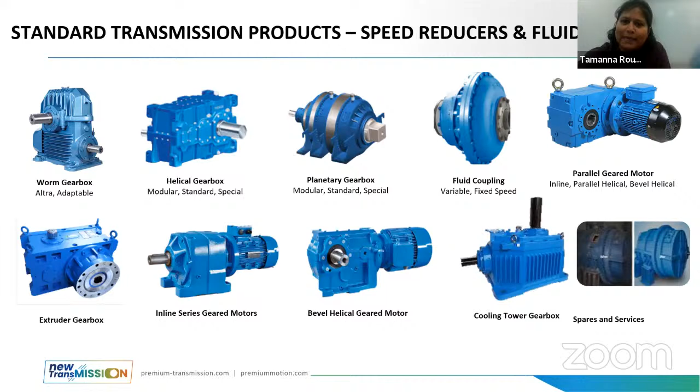We also make a lot of customized couplings and gearboxes. There's something called drive pack solutions, which is a combination of gearboxes and fluid couplings. As we saw, Premium is one company which has the complete package - for any mechanical transmission whatever is required, we are a one-stop solution. We can make gearboxes and fluid couplings both, and together this is called a drive pack.

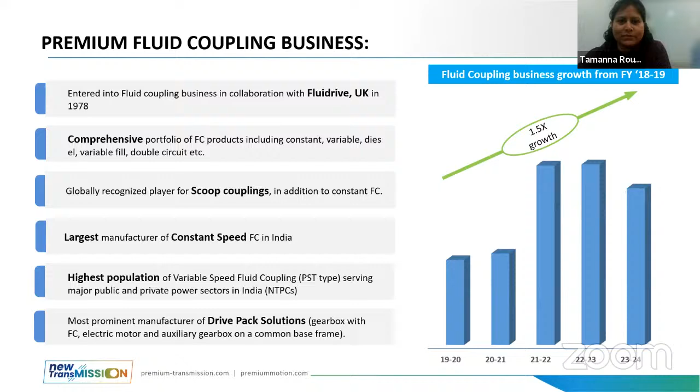Year on year we have seen a lot of growth in fluid coupling, which means this business is growing. Business growing means this product has a need in the market. So what you are studying in college, at least some of you are going to need this technology, this knowledge, when you go outside of college to industries.

Now from here I'll give it to Abhay. Abhay will talk about the products, the technology - I think he'll start right from the principle.

Is it okay, Roja ma'am? Is the speed okay? Yes, yes, okay. Now Tamanna ma'am explained already about the significance of the product, fluid coupling and gearbox. Let us make this session more interactive since it's an engineering product - if I keep talking, maybe something may not be clear to you. If you have any doubt, you can stop me and ask questions. In the seminar hall, keep yourselves unmuted, and if there are any questions, people can ask right away. Please make it interactive, because we've been in the industry for the past 15-20 years, so generally we go in a flow, and being in sales we also get into sales mode at times. So please keep asking questions.

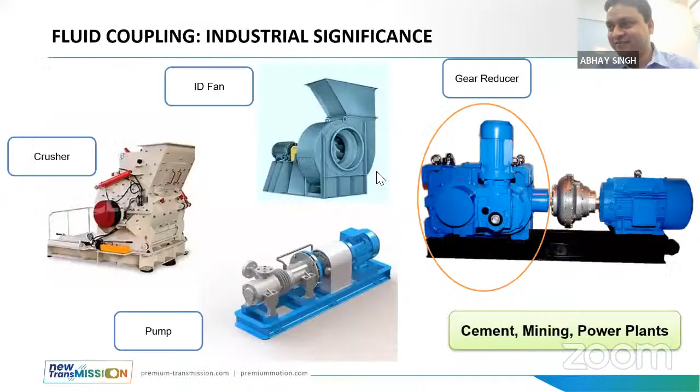Now, is this slide visible to all of you? Yes, sir. Hello. Seminar hall, can you see the slide? Yes, sir. Hello. Sir, we are responding, are you getting our voice? Hello, hello. We can't hear you. Maybe you can answer in general. Sir, we are responding, are we audible? Yes, sir, you are audible. Are you getting our voice, sir? We are responding. We are not able to. Oh, okay. Sir, you are audible. Hello, okay sorry, there was a problem. So we will be joining from my screen. So are we audible? Yes, yes, yes ma'am, you are audible. Sorry, we were not able to hear, there was some problem now. Is this slide visible to all of you? Because this is important. Yes, ma'am. Sir, your screen is visible. Are you getting my voice? Yes, we can hear you. Yes, we are responding, sir. Might be there some technical issue or internet problem. No, no network issue, there was a challenge on our side. It's sorted now, we'll go ahead. Okay, yeah, yes, now good to go.

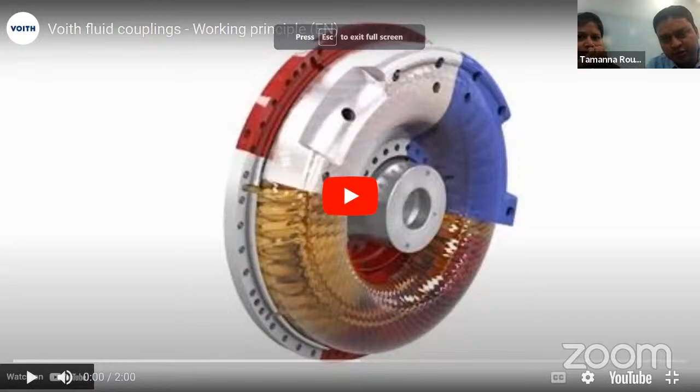Can you see the video, one of the videos from YouTube? Yes, sir. Okay, now it's a very simple illustration.

Then after some time you see what happens, and in between there is nothing placed. It is only air, no fluid, nothing, only air. So now let us start the video.

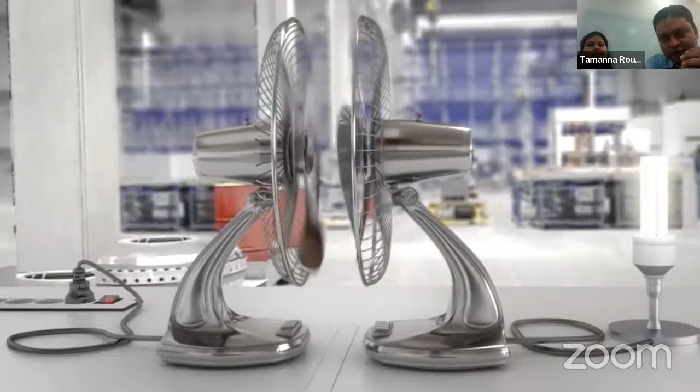You see, once you start the first fan, then the second fan also gets started. And now you have to understand why the second fan blade is getting started. You see... yeah, then you see the complete video, then we talk about it. Try to understand what is happening here, then it will be more clear how the fluid coupling works.

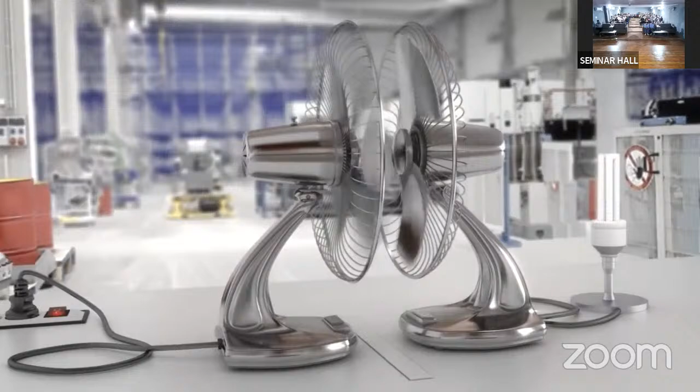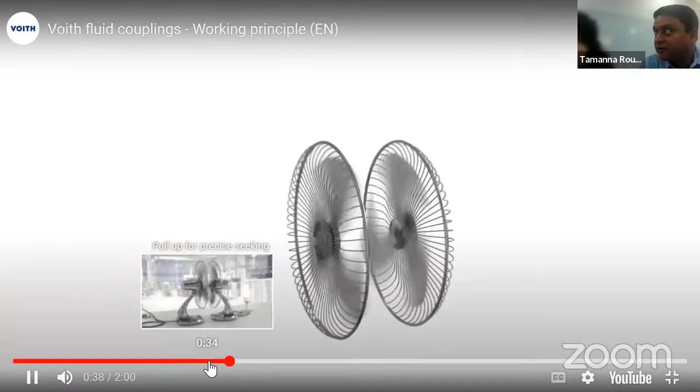Sorry? Impeller, correct, very right. The left part is the impeller getting power from the electric motor, and the right part is the runner which will be connected to the driven machine.

And now you tell me how this second blade is getting started. Which fluid is responsible for that? Air. Air, very right, yes, air.

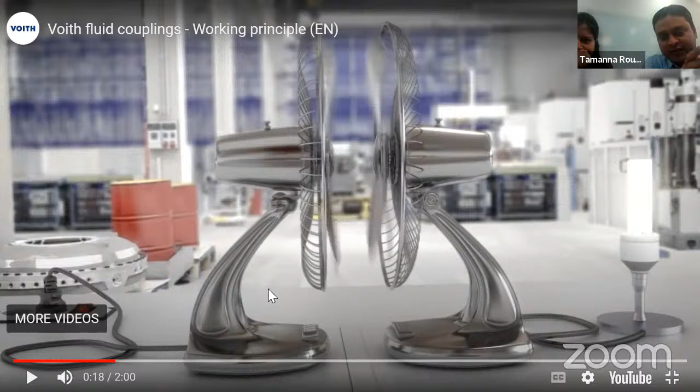So in this case, air is taking the power or energy from the impeller and transmitting it to the runner, and the runner is connected to some other machine and giving back energy to that other machine. So in this case, power is transmitted through the air, so we can call it air coupling, not fluid coupling.

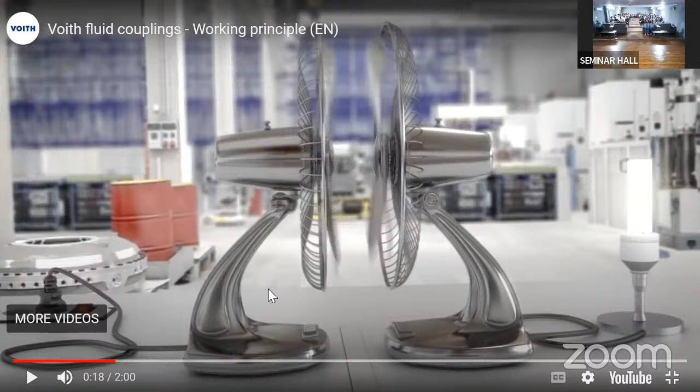Okay, but if you replace air with oil or any other fluid, it becomes a fluid coupling in a closed circuit. Now it is an open circuit because we cannot entrap the air, it's completely open to the atmosphere. But you have to make a closed arrangement, in which you put some oil or water, and then give power supply only to one part.

We call it the impeller. Then after some time, you will see that power is getting transmitted to the other part without any mechanical connection. So connection is established through the fluid only.

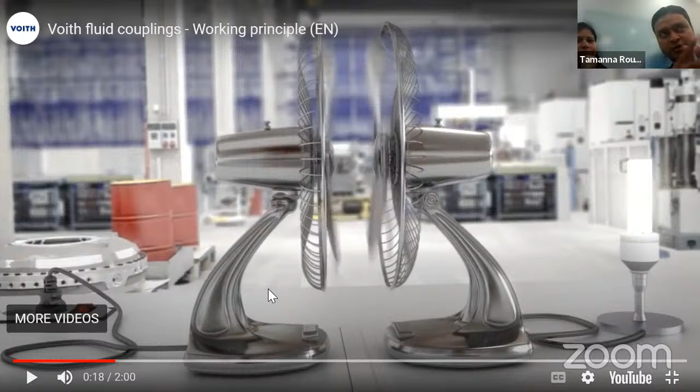Okay, I think this video is very clear on how this fluid coupling works. Is it okay? Yes, sir, perfect. Yeah, now you can see.

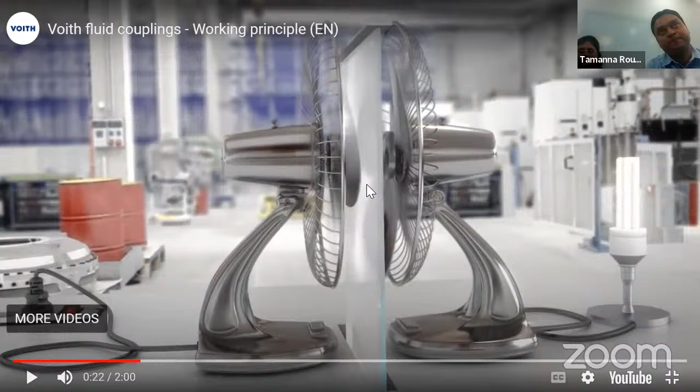Now you have to understand what happens here. If you put a glass plate between the two fans, now you cannot transmit the air flow from one side to the other side. So this glass plate is obstructing the power transmission.

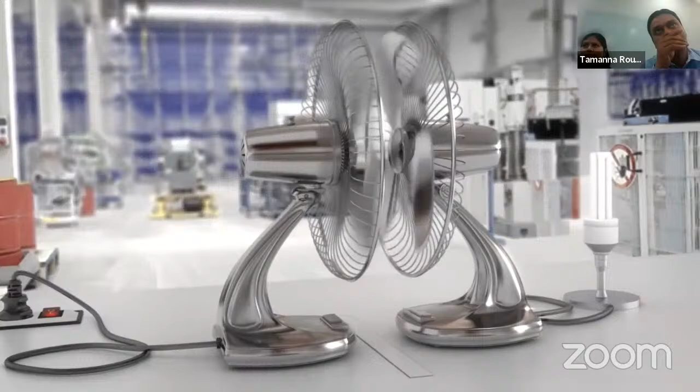See here, once you put the glass plate, the second fan is not rotating because you have obstructed the flow of air. Now you put the glass plate, so you stopped the air movement, so the second fan also does not rotate.

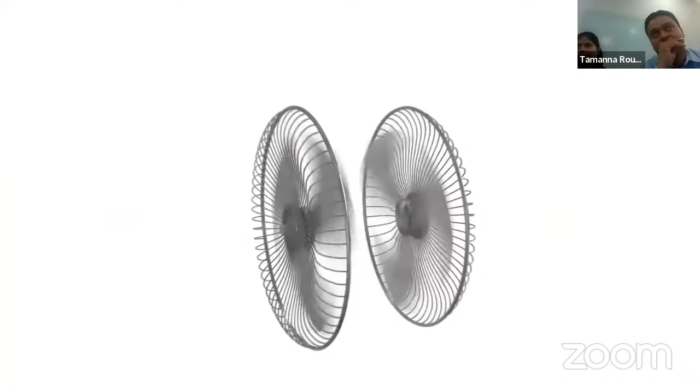Now you can see this will be converted to the impeller and runner. You see, so the fluid coupling looks like this only. Two major components, impeller and runner.

Between them you find the fluid. You can see here. That's it. It's very simple.

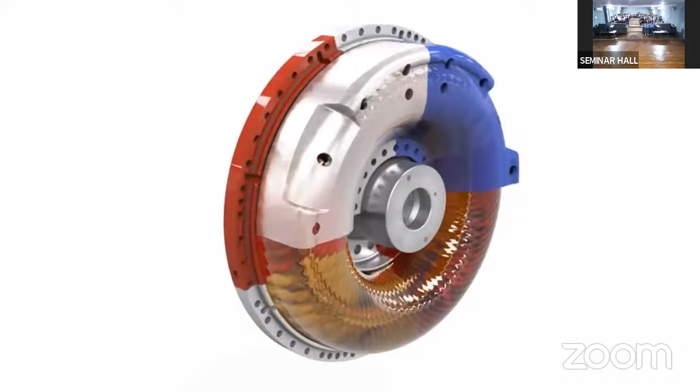So in this case, you don't have the mechanical connection. Connection is established through the fluid only.

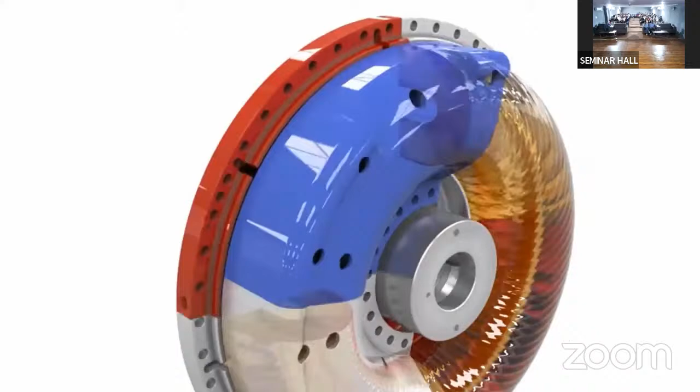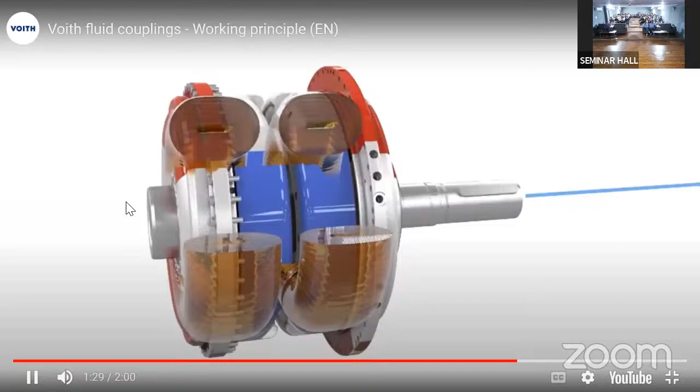We can talk about it in a later slide. Okay, I hope it is clear now. Now let us go to the next slide.

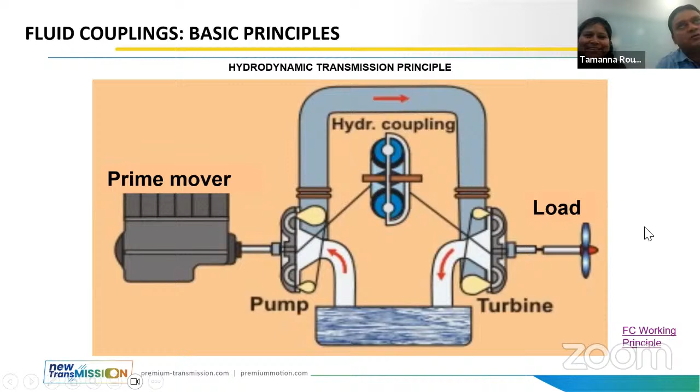So in coupling, you have both possibilities - you can get constant speed and you can get variable speed. Now the next question is, why do you need variable speed?

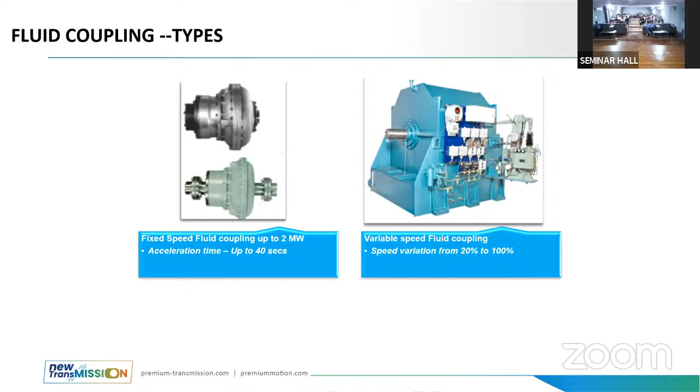Okay, now let's go to the next slide. Sorry, this is a YouTube video. Sorry, this is a little inconvenient. Okay.

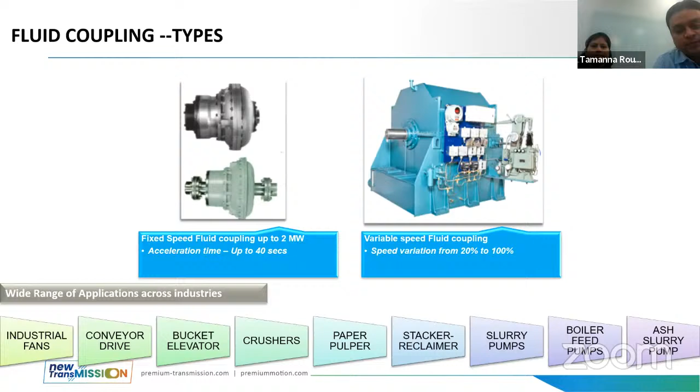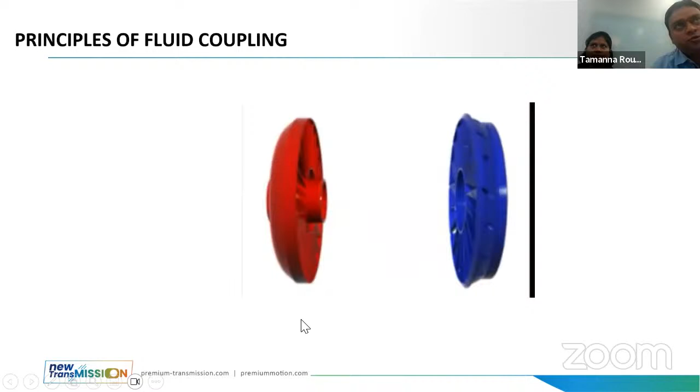Now this video is visible to you. Yes, so now it is again the same video. You can see here the left part is an impeller, the right part is a runner, and between them you find the fluid. This fluid is responsible for transmitting power from the left part to the right part. This is the same video we showed in the past slide.

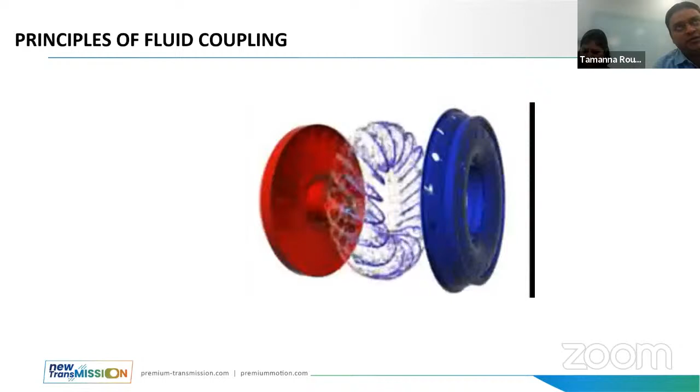What you see in between is the ring of oil, we call it a vortex. This vortex is what transmits power. And this vortex can be oil, or it can also be water.

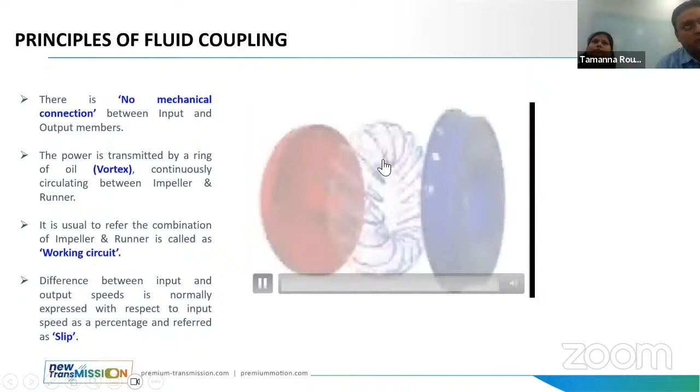We'll talk about that later. Then the combination of impeller and runner, we call a working circuit. So this complete combination is called the working circuit. And this last point is very important.

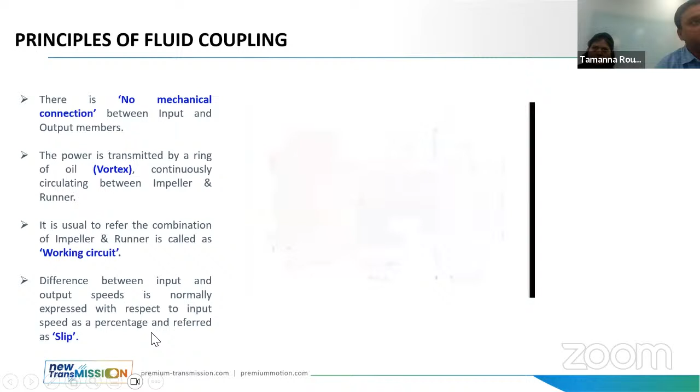The difference between input and output speed is normally expressed with respect to the input speed as a percentage, and is referred to as slip. So this point means that if the left side is rotating at a constant speed, the right side will be rotating at a lesser speed, and that differential speed we call slip.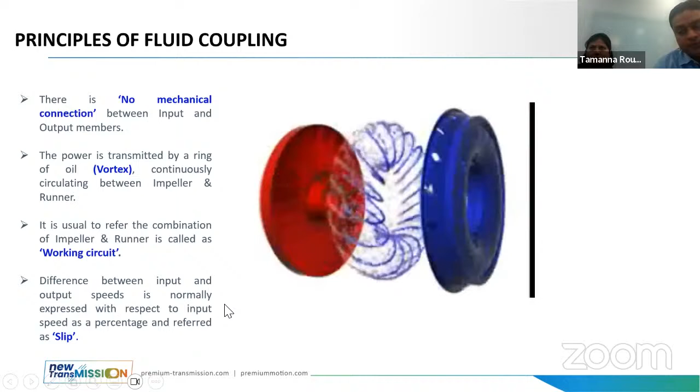नाउ कांस्टेंट स्पीड का हमने बात किया। सो लेट अस टॉक अबाउट द वेरिएबल स्पीड फ्लूइड कपलिंग। हमने लास्ट स्लाइड में दिखाया था ये पिक्चर आपको। ये देखिए, ये वेरिएबल स्पीड फ्लूइड कपलिंग है।

तो बहुत सिंपल प्रिंसिपल है। अगर आप क्वांटिटी को कांस्टेंट रखते हैं तो यू ऑलवेज गेट द कांस्टेंट स्पीड, बट विद द हेल्प ऑफ सम मैकेनिज्म इफ यू कैन वेरी द अमाउंट ऑफ द ऑयल इनसाइड द सर्किट, इनसाइड द इम्पेलर्स, देन यू गेट द वेरिएबल स्पीड। तो वो आपको सोचना है। बीइंग एन इंजीनियरिंग स्टूडेंट यू हैव टू थिंक how you can vary the amount of the fluid while working condition।

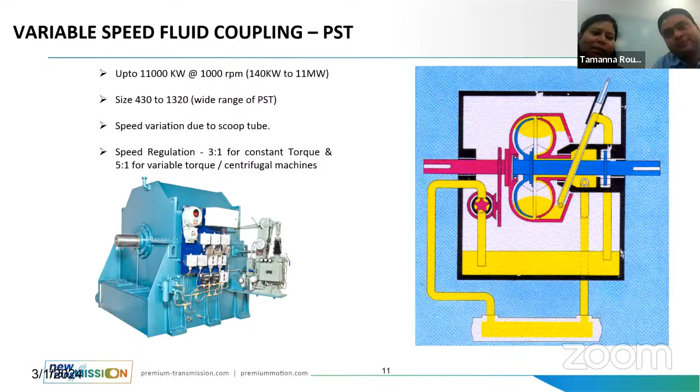Aur agar yahan rule hai, if you don't ask then Abhay asks. So either you have to ask or Abhay will ask. So it's up to you. Abhay sir will ask. Okay, Abhay sir, please ask.

Like at home, when you use a fan and it's a very old fan, when you switch it on, the fan starts abruptly. So it is a very strong start, which is sometimes not good for the life of the machine. So you have to ensure that the fluid coupling helps to start the driven machine softly. So this is one of the advantages.

If you didn't use fluid coupling in a conveyor belt, the belt's life would reduce. For example, if it is directly connected to the belt, it gives 6 months of life. But if you use the fluid coupling between the belt and electric motor, it can extend the life up to 5 years. So the fluid coupling helps enhance the life of the driven machine because of the soft start.

This is the first important advantage. Then, low starting current. If your electric motor is directly connected, then the motor will consume 6 times higher current than the nominal current, which is very high. But if you use the fluid coupling, the motor will consume only 1.5 times the nominal current of the motor. So this is a highly energy efficient method.

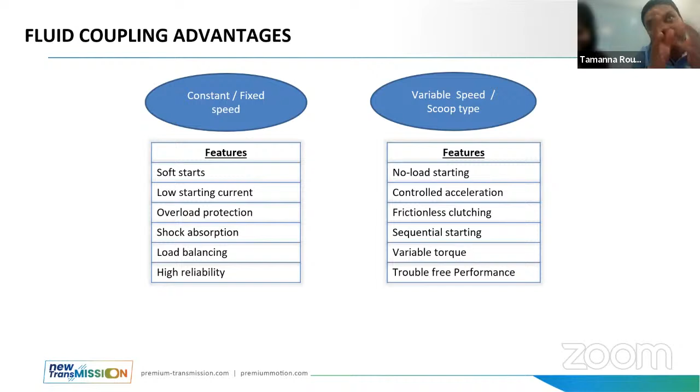Now in variable speed coupling, you get almost similar benefits, only you get variable torque here. So apart from the other benefits, you can vary the torque as per the requirement of the application. All other advantages are similar to the constant speed fluid coupling.

Is it okay for you? Yes sir. If you have any doubt, you can stop me and ask.

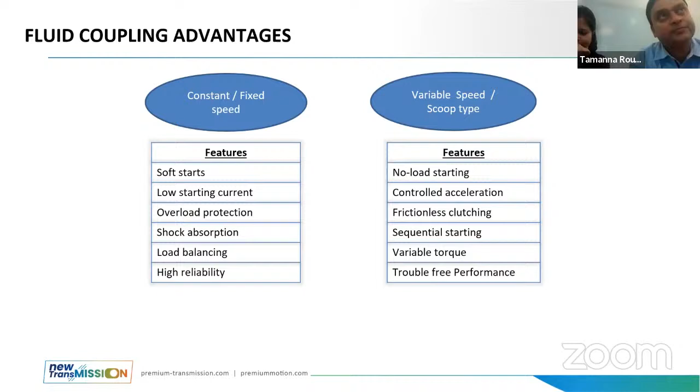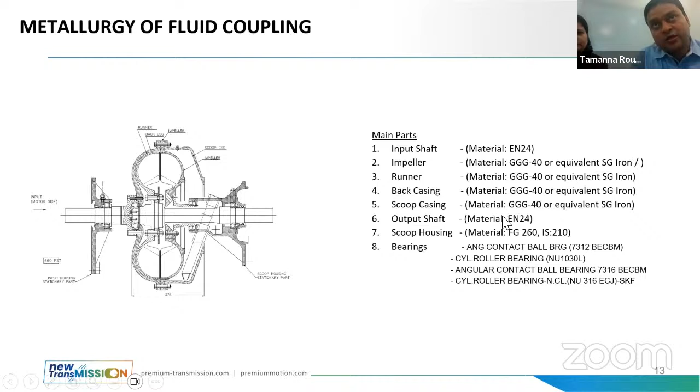And then for the bearing, we can have a variety of bearings. All bearings are anti-friction bearings.

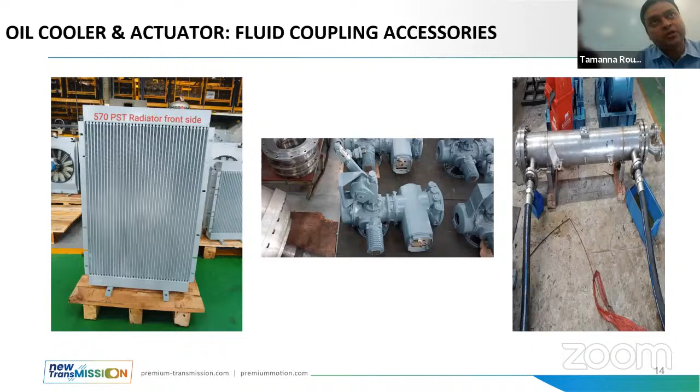So all these components are the accessories to help the fluid coupling ensure its smooth operation. And this is the electronic part, the robust control by the electronic instrumentation.

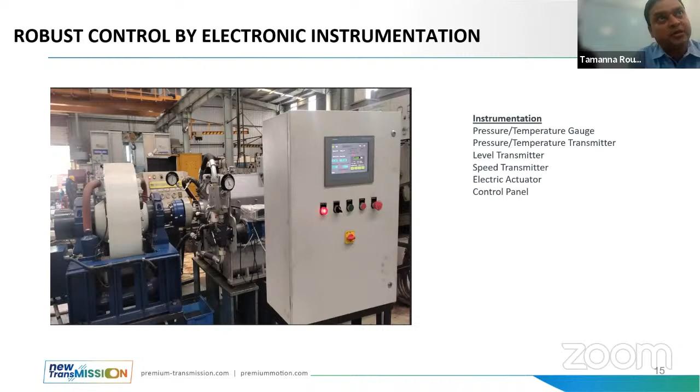Been to any power plant? Anybody of you? I'm not able to see any hands raised up.

Okay, so we'll just quickly take you through a process flow chart of a thermal power plant, so you get to know what processes happen, where transmission happens, where mechanical transmission happens, and where these couplings are fitted. That will just give you a little brief.

Also, whenever you go for placement, this may be an interesting topic for all of you, because in interviews also they may ask you something related to the power plant. So for any mechanical, or maybe sometimes civil engineer as well, it's a very interesting topic. You must understand the flow process of the power industry.

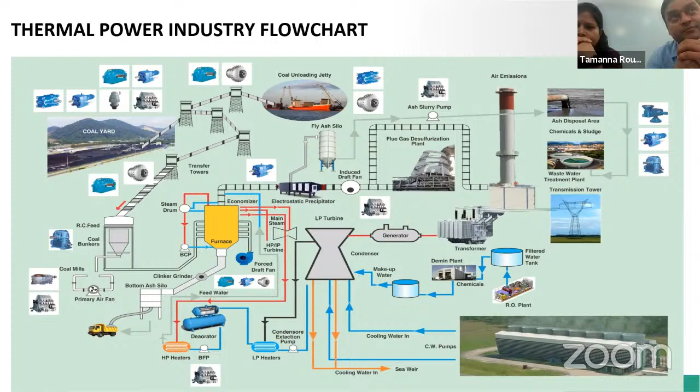Is it clear? Yes sir, perfect.

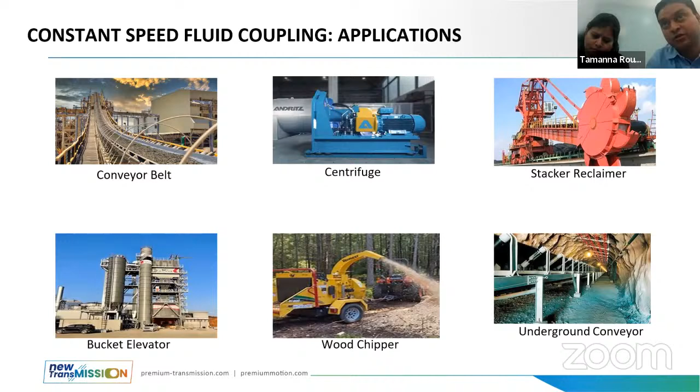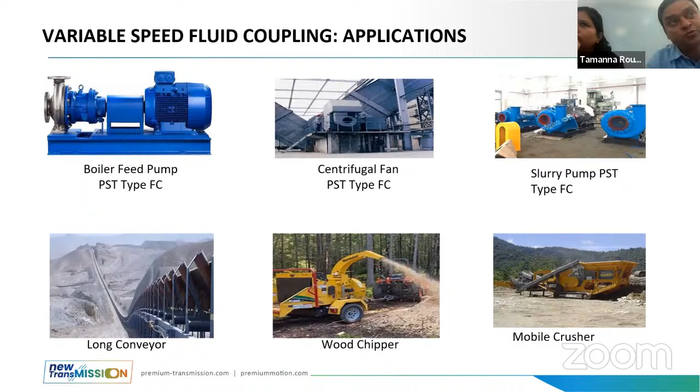And underground conveyor belt में भी आप एक्वा फ्लूइड कपलिंग यूज करते हैं जहाँ पे ऑयल की जगह पे वाटर यूज करते हैं. And then this is the application for the variable speed fluid coupling. So pump है, fan है, slurry pump है, mobile crusher, again wood chipper and long conveyor. So these are the applications where you have to vary the speed with the help of the variable speed fluid coupling.

Then this is the load testing setup in our factory in Aurangabad. आप जब coupling बना लिया तो you have to make the load testing before dispatching, otherwise you make a mistake.

So now you can see here, this is the electric motor, this is dynamometer, where you have to apply the load. Between these two spaces, you have to mount the fluid coupling. Okay, and then you apply the 2000 Newton meter load with the help of the dynamometer.

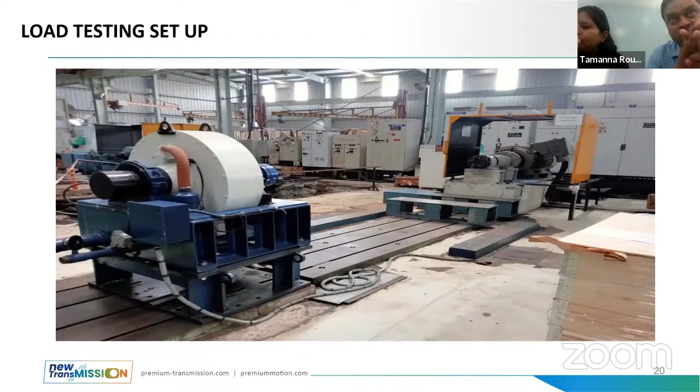Then you check the vibration, you check the temperature, you check the pressure, and you check the leakage, and also you check the sound at 1 meter distance. So all the parameters, if they come within the defined limit, then we approve it. Then the coupling is ready for dispatch. So this is one of the critical manufacturing processes where we ensure the quality of the product.

और हम एक रिपोर्ट भी जनरेट करते हैं, वो रिपोर्ट भी यूजर को जाता है. Is it okay or you have some question here? No, sir. Okay, perfect.

Now this is an opportunity in the global industry. Here you can see it's the global map where we talk about the mining companies and cement companies. आप देखेंगे worldwide, every country में, every continent में you find the mining industry. So it is a huge industry.

So showing this slide, the purpose of showing this slide is to talk about the opportunities for you guys. If you understand the industry, you understand the application, you can venture and you can maybe utilize your experience to the various applications globally, not within India only. So likewise, cement industry also, you can see a lot of cement industry globally.

Okay? और अगर आप potential की बात करेंगे तो then you can see here एक power plant में, sorry mining में 500 fluid coupling use होता है. Only one mining, 5 million ton per annum का capacity वाला mining में 500 fluid couplings you can use. In one of the thermal power plants you can use 200 fluid couplings. And cement plant में 25 fluid couplings. So potential wise आप देखेंगे तो all core industries में this is one of the very popular applications of fluid coupling.

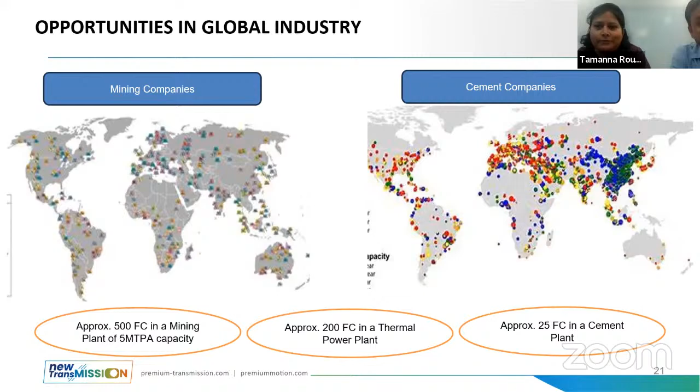The idea of keeping this slide is that when you are studying something, there is opportunity at a global level. We are not restricted to one state, one country, or one continent. You can apply your knowledge everywhere, wherever you go. This is only to give you a perspective of the opportunities available when you step out of the institution. All right, this brings us to the end of this presentation. If you have any questions, we'll be happy to take them.

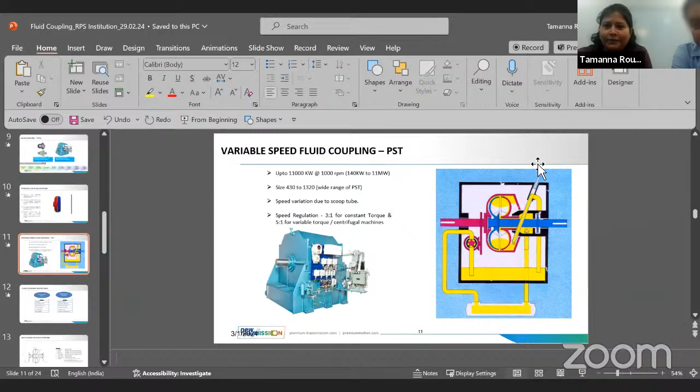Ma'am, which oils are used in fluid coupling? As I told you, we can use oil from different brands like IOCL, HPCL, or Shell oil, which has a viscosity of ISO VG 32 or ISO VG 46. There are 5-6 popular brands in India, so you can use any of them. You just have to ensure the viscosity of the oil.

Sir, are these the same oils used in automotive industries, like engine oil in our vehicles? No, the automotive industry has a different requirement for viscosity. Even the gearbox industry has a different viscosity requirement, like ISO VG 320. Fluid coupling requires something different because this fluid coupling has to transmit power through the fluid. So optimization of the viscosity is very important, otherwise you lose efficiency.

Yes, if you go to a place like Russia with extreme low temperatures, where the ambient temperature is sometimes below -40 degrees, then you have to change the viscosity, otherwise you lose efficiency. And if you are using the fluid coupling in a hazardous application, you have to use fire resistant oil, which has a different viscosity. So depending upon the ambient temperature and the application requirement, you have to make the proper selection of oil.